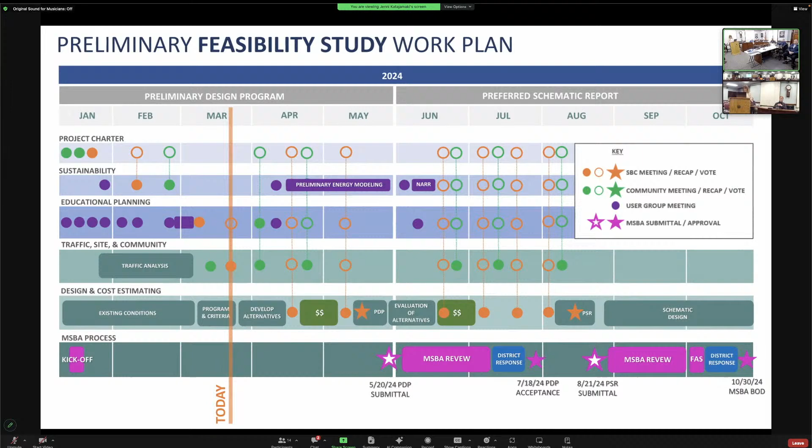So for the existing conditions assessment, we looked at all of these disciplines: environmental, civil, structural, building systems—that's mechanical, electrical, plumbing, and fire protection systems—building envelope, that's the walls and the roof, the interiors, code compliance, hazardous materials inside the building, and geotechnical, which is pending.

What we did: we looked at a lot of existing documents, did site visits, questionnaires, and a lot of discussion with the facilities department. Different members of the team also reviewed records from the health department, the fire department, and utility companies. We did database searches of various state and federal sources, and sampling and testing of potentially hazardous materials.

Starting with the easiest one, environmental, because basically there are no problems here. One of the things we look at with environmental is the prior use of the land. Prior to its use as Killam, it was undeveloped land. We looked for any evidence—visible odors, some air testing, any evidence of contamination, dumping, hazardous materials. The only interesting thing that came up was an underground storage tank, but we tracked down all the records—it was for oil before it was shifted over to natural gas.

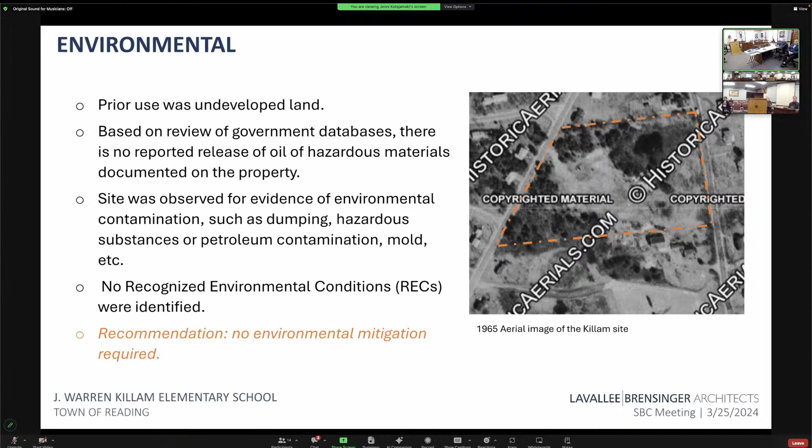Our consultant tracked down all the records for that, and it appeared to be all properly disposed of, and there were no reported spills. So basically, based on what we've found, we believe there's no environmental mitigation required.

I'll warn, of course, that when we go in there and do the actual physical testing, anything can happen. But I thought I'd say that.

Yeah, what we haven't done is tested soil. So when they go in and dig underground, they might find something, or they might find debris, whatever it is, we don't know. We commonly find lead and asbestos in a number of our sites, from old paint or God knows what else.

On the stormwater and sanitary, this diagram shows where the stormwater runs to on the site. A couple of things to point out: there's a crushed pipe here that's supposed to drain to a pipe to the storm main in Haverhill Street. That doesn't appear to be draining properly, so there's a low point at the northeast corner of the site that we've also observed is kind of soggy. That's the reason. And we've also heard reports that there's water overflowing from the Killam property to the neighbors to the north, which are at a lower elevation.

Most of the water management is through just on-grade surface runoff. So as part of this project, we'll be required to do a whole new stormwater management system that will retain or detain, I always get the wrong word. We just want to hold the water on the site and let it drain out slowly.

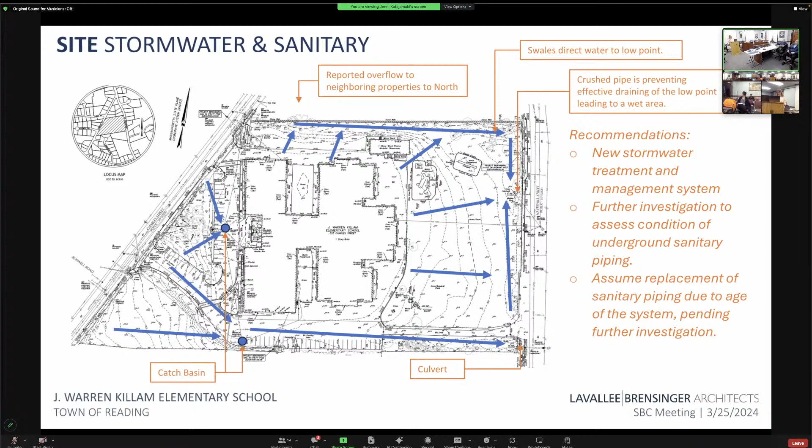I'm just going to keep going through, and if you have questions, stop me. On the site regulatory side, we determined the site is not in the 100-year floodplain, there's no wetlands, no protected wildlife habitat, so those are all good things. We don't have to go through those special regulatory reviews.

One thing that did come up is there's a parking requirement of 1 parking spot per staff person and 1 per 7 children, for a total of 200. If we go with the larger scheme of 690 students, it's a total of 211 spots required on site.

I would go in on this one and say it's really up to your town. That's a lot on a small site, that's a lot of pavement. When we work through it and decide what's actually the right number, I'm sure we'd work with planning and everybody to come up with what everybody feels is the right number. Does that make sense?

That seemed like a large number to me, even looking at your rough numbers. That's where the regulations usually start, but I have found it's more of a negotiation usually. So whose regulation is this? It's the town's zoning, so it would just be an appeal to the zoning board of appeals if we wanted to have fewer than that number of parking spots.

Do you know how many we have now, by any chance? No pressure. I don't know, do you know? Not as many as that, I think. No, it doesn't seem like there's that many, maybe 80? Yeah, something like that. There, they're parking on the streets too, we know there's, we'll find out later. So this is assuming a lot of things. Yeah, because I think the parking you have now is actually about right, since it's enough for basically all the staff and a couple of visitors, right?

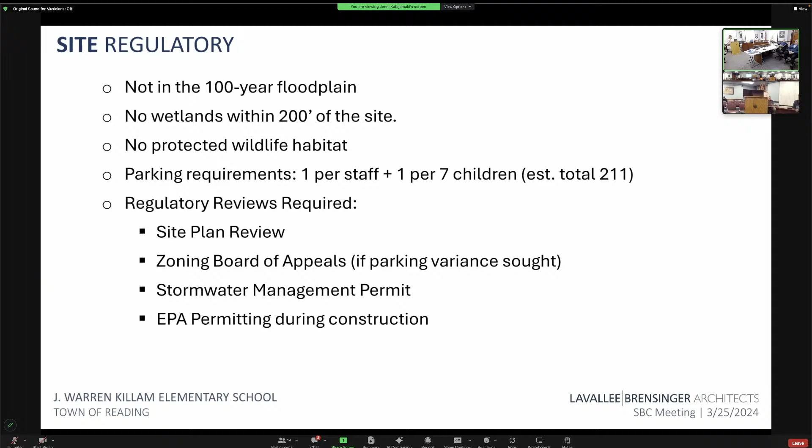The reviews we will be going through are site plan review with the town, potentially the zoning board of appeals, and we'll need a stormwater management permit. That'll happen at the same time as site plan review, and then there'll be some EPA permitting that has to happen during construction, which the contractor is responsible for.

So the structural system - the structure is typically concrete-filled hollow structural steel columns with CMU basically infilling in between the walls. I don't know how much I need to go into this level of detail - basically it's a steel structure, that's all I need to say about that.

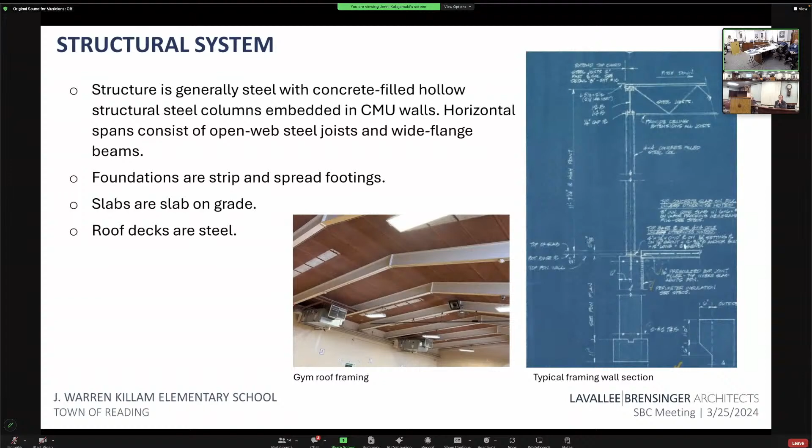Does that mean there's a high recyclable aspect - when I see those steel beams I'm like, okay great, those aren't going in the landfill. Sure, yeah, steel is recycled.

Is that type 2 construction? It is not type 2 construction - it's a one-story building, so it doesn't even matter. It's basically could be 5B.

So there's a couple of structural issues - there's some settling in this lower right-hand picture, some settling of the foundation. There's some differential movement between one wing and another wing of the building that's caused some cracking. The more substantial issue is that this building was built before seismic codes.

Depending on the amount of area that's renovated and altered, we may be required to bring it up to full seismic compliance with the codes, which basically means rebuilding all of the brick wall, all the masonry walls, because they're unreinforced and have to be reinforced. So that's the entire building, right? Or no - all the walls, yeah, you could probably leave maybe 70-80%, it's basically a bunch of columns with these CMU walls butting right up against them.

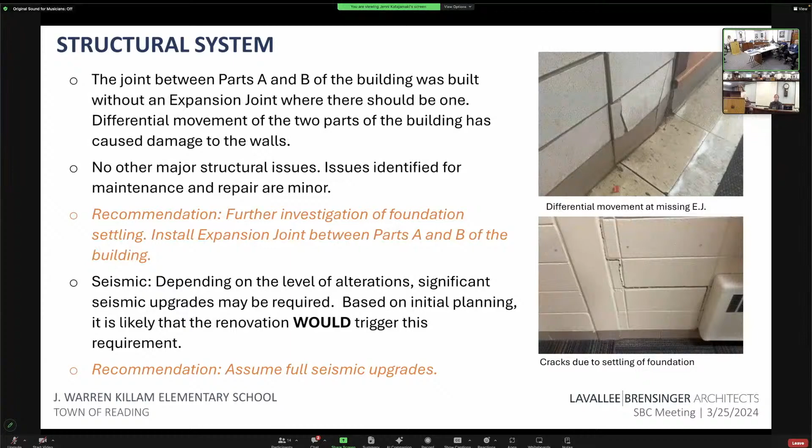So moving on to plumbing and fire protection. Fire protection - we know the building doesn't have sprinklers and it would be required to have sprinklers, so that would be added in the renovation scenario.

Also, there's some smaller problems with plumbing, but the primary problem is that there's lead in the water, and the source of that contamination is not known. It could be from the city water mains, it could be from underground water service, it could be from solder. So, also because of the age of the system, we would recommend a total replacement of the plumbing system.

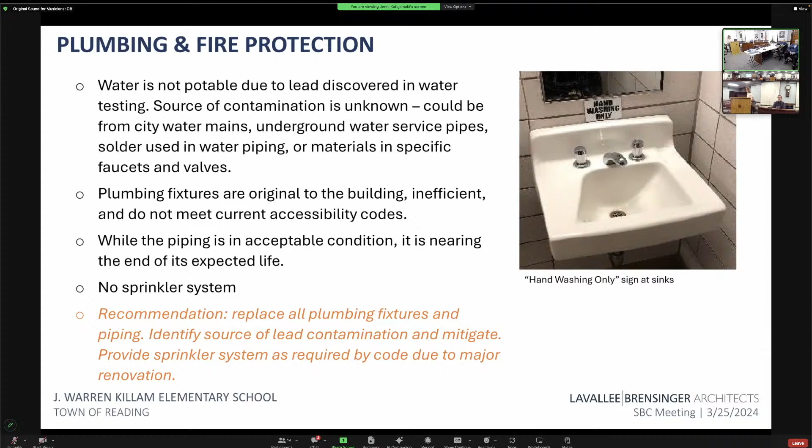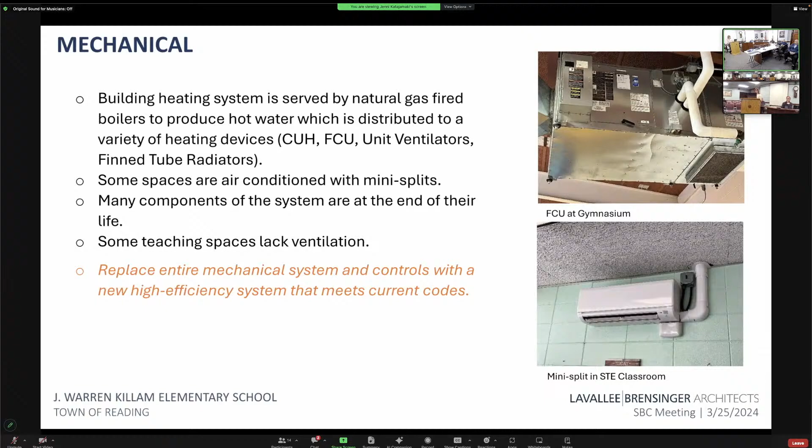The mechanical system has also reached the end of its expected life. So in a renovation scenario, we would recommend full replacement of the mechanical system. Same with the electrical system and fire alarm.

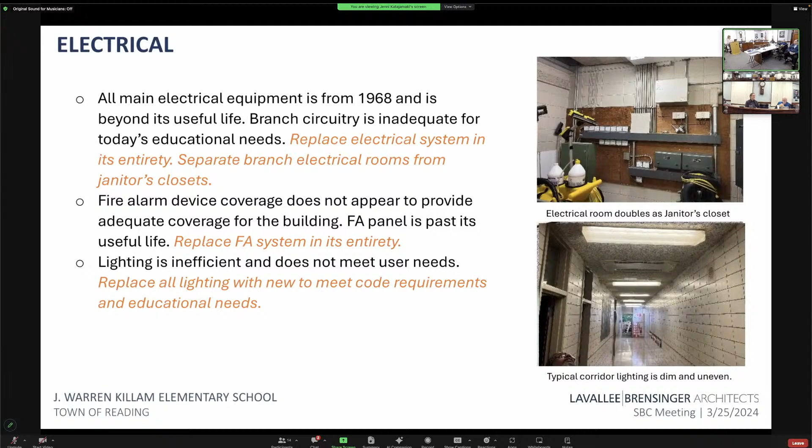One concept I want to bring up is that we're not just talking about patching something up. We're comparing taking this old building, which is there for a reason, and bringing it up to at least 50 years of additional life, compared to a new building which is maybe 75. So we're not talking about patch and repair. All of our cost estimates will try to make an apples to apples comparison, because otherwise you're not going to get much value from these. I hope that's fair.

On the building envelope, as Lee said, there's an airspace between the exterior brick and the backup CMU block, with damp proofing and flashing according to drawings, but no insulation. We haven't actually investigated to see what's there. Generally the walls were in good condition, but there's one area along the north facade with a lot of efflorescence and missing grout, which we think could be due to the airspace being blocked up behind the wall so water is weeping out through the brick instead. That would require more investigation, but in any case we'd recommend assuming a full reclad, removing all the brick and replacing it with new brick or a different material.

I'm not a construction person, but those concrete pilasters we're looking at would all have to be individually replaced. That's not how you build buildings now, and it's not up to code. Those concrete pilasters aren't the structure, they're not structural -- in a way those things are decorative. The steel is inside, you just don't see it here.

What I will say is, in our experience, when we open up a wall like that, it's usually bad. The reason is it wasn't flashed right, and it's been a long time. There's actually a steel column and plate exposed to all that water, which could be rusting. If water is actually pushing through, it means it's not weeping properly.

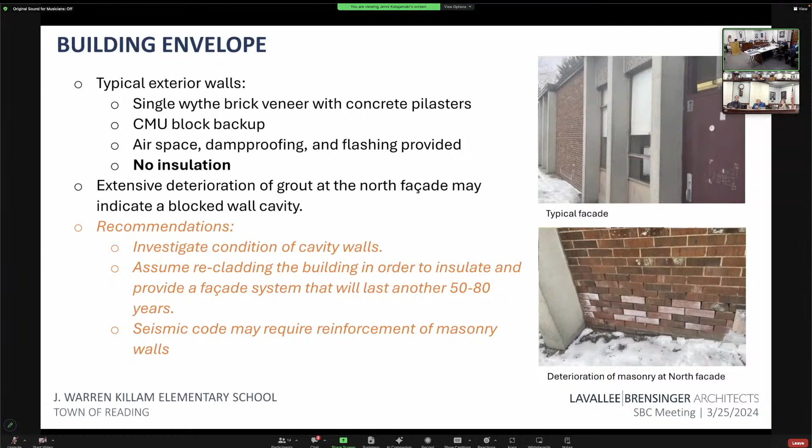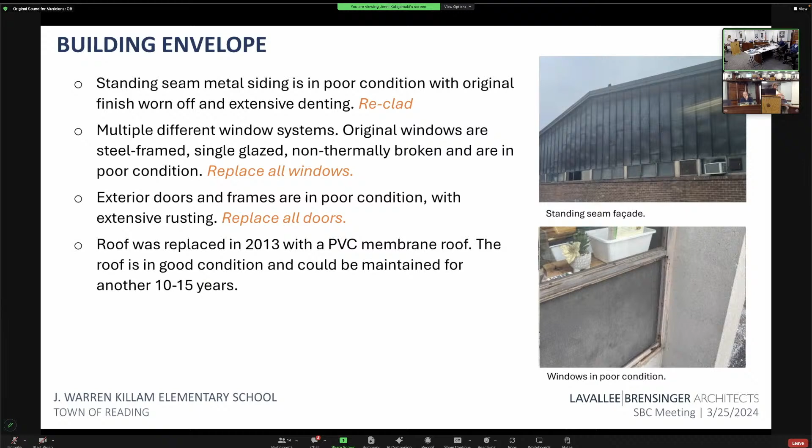A couple other envelope components: the windows and doors are a complete wreck and absolutely need to be replaced. The roof is okay, but given the level of renovation we're talking about, we would probably recommend replacing it so we can get the proper insulation and flashing, and get you a building that's ready to last another 50 years.

Interiors need a gut renovation. One of the things about having all that CMU everywhere - it sounds great, but of course the kids pointed to it and said, we don't like all these blocks, they hurt a lot when I get pushed against the wall. Which is very wise of them. Concrete masonry - they're all just blocks.

Thank you, what's the U for? Unit. Unit, thank you. Okay, CMU. Thank you.

But I do want to say that when you're putting in all new systems, it's not very forgiving because you have to drill through everything, cut it, patch it - because it's all block - and that just makes for a lot more cutting and sawing and all that.

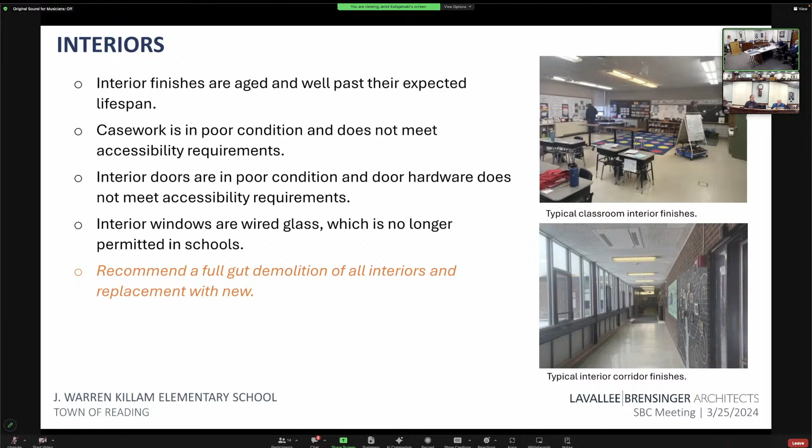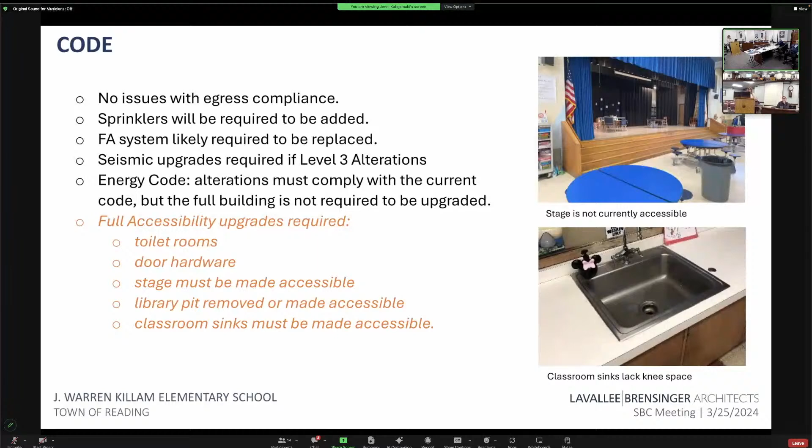On code requirements, there's no issues with egress compliance - that means the number and width of exits. The accessibility issues are relatively minor for a building of this vintage because it's only a single story, so you can access all the spaces except for the stage, which would need a lift. But toilet rooms need to be made accessible, door hardware needs to be made accessible - all these things will happen in a gut renovation.

On hazardous materials, there is asbestos present in the building, which we know - all buildings of this vintage basically have asbestos-containing material, and that needs to be disposed of properly in any renovation or demolition. Also, in spaces that will be the preschool, there will need to be lead mitigation, and that just needs to happen.

Surprised it wasn't the whole school. The rest of the school doesn't need it because the lead regulations are only OSHA regulations that have to do with the safety of workers during construction.

If I can just pipe in on the asbestos, for the record, many buildings of this vintage have it. If it's not being disturbed, it's not a safety issue. When we're talking about insulation on pipes and stuff, many of those pipes are buried in walls and ceilings, so I don't want people worried that there's asbestos in the building - it does not mean it's unsafe. Once you start disturbing those areas, we would need proper abatement, and that will absolutely be done, but it's not a danger as it sits right now.

Thank you, Mike - I just support that. There is no asbestos problem with the building as it stands right now. It's all contained; it's once you start moving it that matters. As long as it's not disturbed, asbestos is perfectly fine.

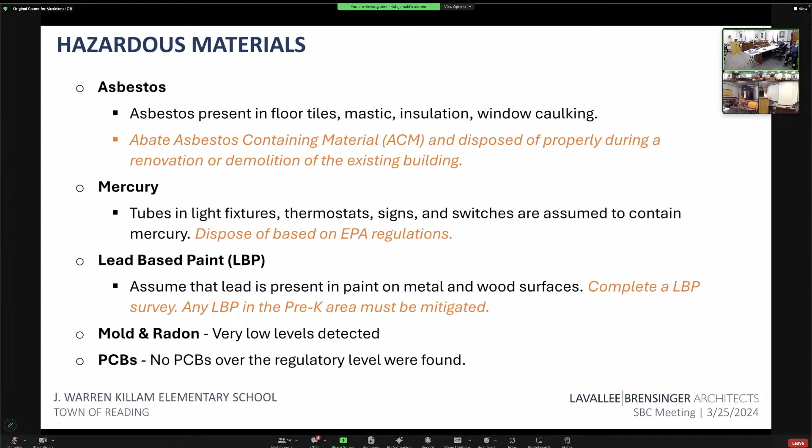There was no mold or radon detected, or very low levels below regulatory thresholds, and the same with PCBs.

Then on the program, so this is interesting, right? If I have here the program summaries of your existing building, you have about 60,500 gross square feet, that's with the portable classrooms. Option 1 with just a partial pre-K program would be about 103,000 square feet, and option 2 with the 12 pre-K classrooms would be 123,000 square feet. So we need to add somewhere between 40 and 60,000 square feet.

So the biggest problem this creates is on the site. If we leave the whole existing school and build an additional 40 to 60,000 square feet, there's not going to be any space for a field, and it would be very tight to get enough parking, drop off, and play spaces without a field.

We'll be looking at those kinds of diagrams, starting with traffic and all that. But we wanted to give you a preview that the renovation of the existing building, or even half of the existing building if we decide, is going to be predicated a lot on what actually can fit on the site, which is necessarily a larger building that has the program that the MSBA requires, and also the program that your special education and everything requires. It does not have right now.

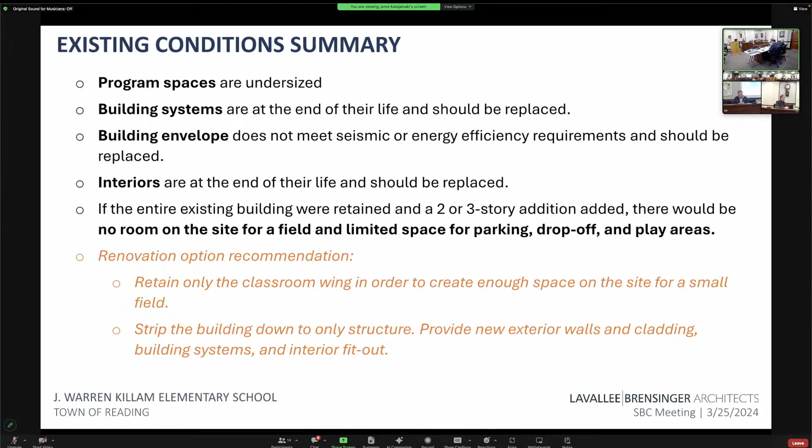Cool, we want to get to the traffic thing if we can. That's the end of my existing section. We promised this is a draft, it can be modified, we don't have geotech yet, and we'll be posting it soon enough. Once we've gone over it one time, you could study it more in detail. Fair enough? This is excellent, Jen, this is awesome, thank you so much, Jay. Really, really great. Good, this is very interesting to hear. I think it confirms a lot of things, but it's good to see it in print.

And I'll turn it over to Rebecca to talk about traffic. For those of you who don't know, Rebecca and her company did the traffic study at Swampscott, which was very intense in their neighborhood, and they also did Acton and Foxborough, and other places, and worked very well with those communities, which you saw. Take it away, Rebecca.

So I know a lot of you saw the presentation already last week at the community meeting, so I'm going to give just kind of a brief summary of some of that existing condition stuff and talk about what we heard from people at that meeting, and then I'll go forward talking about the next round.

So the things I want to discuss with you tonight are covering the study area that we looked at in our traffic study, talking about the existing conditions in terms of what we saw for the morning and afternoon observations at the existing school, the surrounding roadway network and what we saw there, some collision history at surrounding intersections, and also the traffic counts and speed studies that were collected.

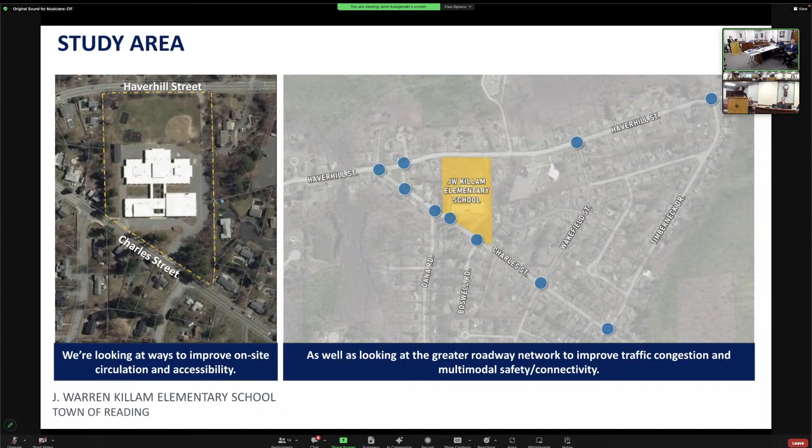But we did get a good handle on some of the accessibility issues at some of these crossings and where there are crosswalks located, where there are crossing guards at those crosswalks or other equipment provided.

By the way, members of the school committee and other town people were at the community meeting, and they asked me about using or how to utilize your services or understand the areas around in the whole neighborhood that really are deficient, and how to bring all that up since our focus is on the site itself.

Yeah, so we did identify a number of deficiencies that we'll walk through in the surrounding area, many of them that can be addressed right now before the school were to even be constructed. So some of the questions we got is what can we do to make this happen now? So we'll show a few things that we can do to make those things happen now.

So for the existing school, obviously there's an elementary school with roughly 420 students enrolled now, and then 2 pre-K classrooms with 30 kids in those classrooms. And you can see from the map here that shows the school district boundaries that this is really a neighborhood school that we're talking about.

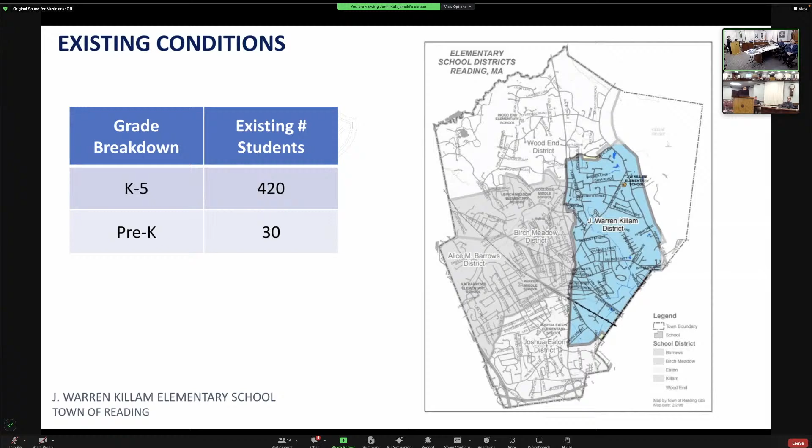So kids are coming from not very far away. There's a lot of opportunity for walking and biking on those nicer weather days than what we saw. But it really is more of a neighborhood type of school.

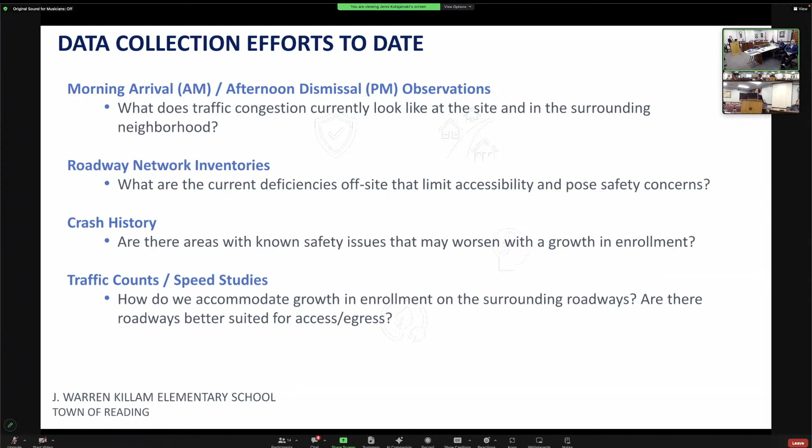The data collection efforts we've done to date were really multifaceted. We went out and did actual observations, boots on the ground, looking at the actual traffic patterns, how people are getting to school, what's going on around here. We also did roadway inventories once all the traffic was cleared and looked at the actual conditions of the roads, the accessibility of the sidewalks and pedestrian crossings. We looked at the collision history to see if there are any significant crash patterns in the surrounding area that might indicate a safety issue. And we also did traffic counts and speed counts, which help us assess where there's heavy traffic volume, where there are high speeds we want to keep kids away from, and which roadways are better suited for access and egress.

And it's not that bad, considering it's the morning, and the morning always flows really quickly. It's the afternoon that's always the crazy one. We can improve though. When I did the mornings, it wasn't that fun. No, it's not fun, and they've seen a lot of situations. As I mentioned, this was a 10-degree day, so there were a lot of people driving their kids to school that day. So this really represents a worst case scenario of what happens on those poor weather days when people are driving their kids in.

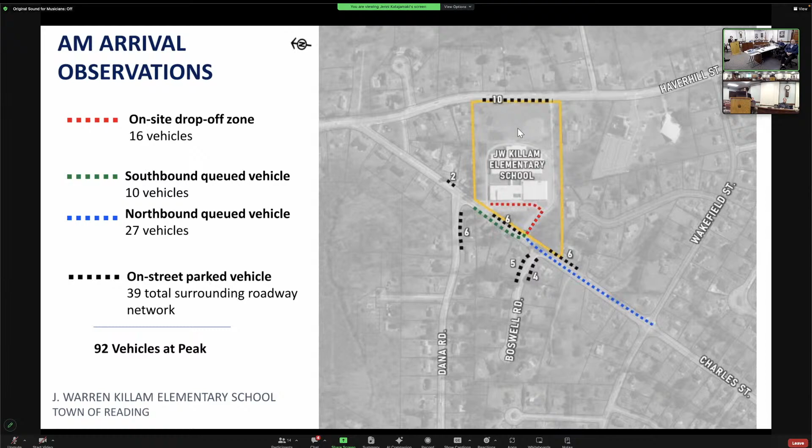Some of the things we saw during those observations: right in front of the school, with all the parked vehicles on the corners and this being a neighborhood school where people are walking, there was a high number of pedestrian crossings in this area. The crosswalk is located, if you come out of the school and take a right-hand turn, right between Dana Road and the school driveway. So all these parents are looking to their left to see oncoming traffic, and then they pull out and there's immediately a crosswalk there. The other thing we saw is that there's definitely some training needed for the crossing guards, as they're stopping traffic pretty much constantly to allow people to cross the roadway, even when they see someone coming from further away.

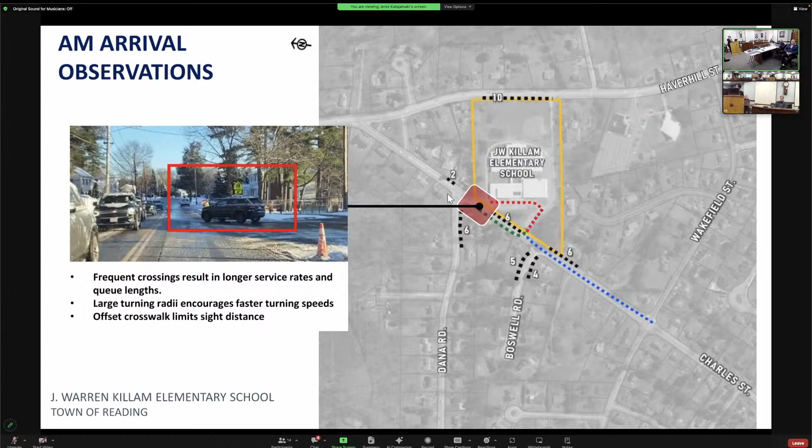So it's holding up traffic quite a bit, where if they were holding the kids at the edge of the roadway, waiting till a few of them collect and then crossing them, the traffic might flow more efficiently. There's also a very wide turning radius there, which gives cars coming out of the school the ability to pull out faster. The location of that crosswalk also creates sightline issues for vehicles coming out of Dana Road, and I'll show you a picture of that in a bit.

So this is coming down to the entrance as you're turning into the school. You can see that the parked cars and queued cars block access for the sidewalk here for the pedestrians walking into the school.

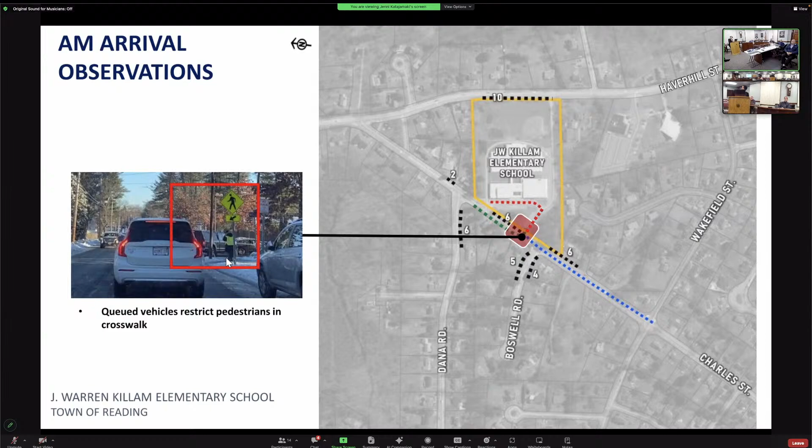That creates really a safety issue for those pedestrians as well. One neighbor talked about how the cars pull up, they're actually parking on the sidewalk, and their kids are trying to use the sidewalk, and sometimes they open the door and the kid walks into the door. They also mentioned people with strollers can't get by when the doors are open.

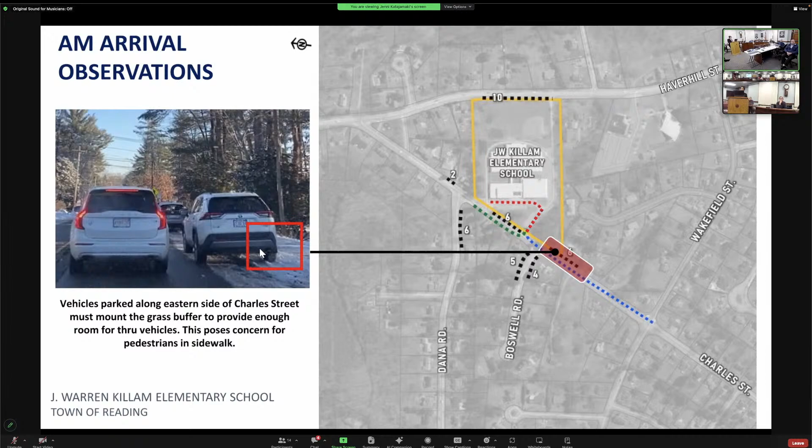You can see in this picture there's a car that's there. There is actually, although it looks like snow here, a grass buffer between the sidewalk and the pavement. That grass buffer is pretty heavily sloped, and you can tell by the angle of this car in the picture, but the cars will pull right up over the grass and onto the sidewalk there.

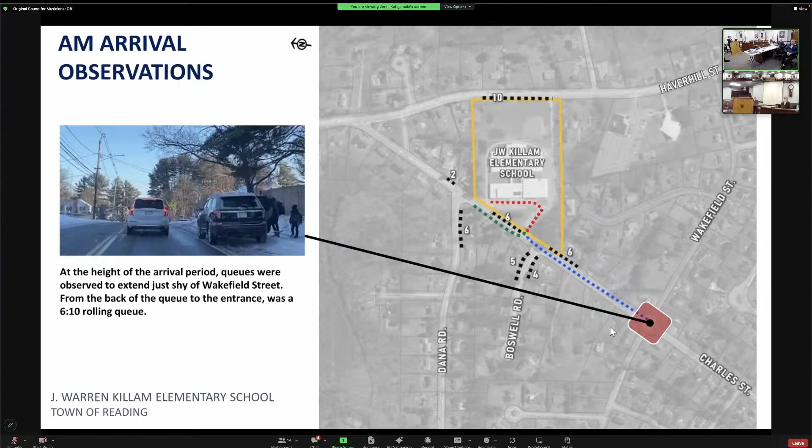And then during the peak of the morning arrival, you can see that the queues are coming all the way back down towards the Wakefield Street intersection. So that's a pretty extensive queue we're seeing in the morning.

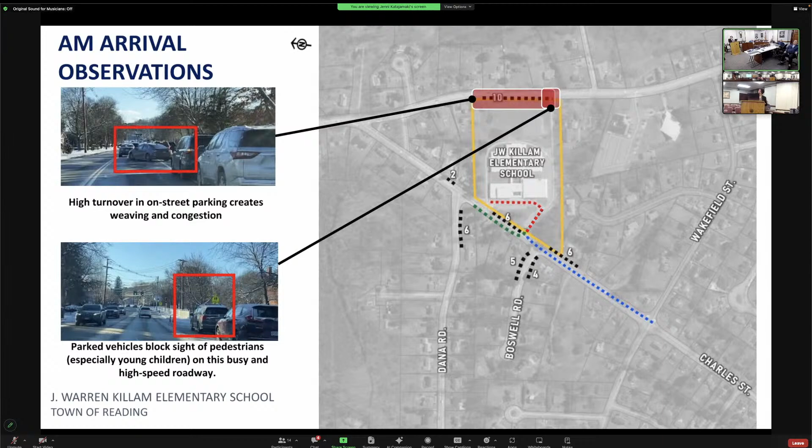Up on Haverhill Street, which is a high-speed arterial roadway in that area, you can see the weaving pattern that happens with cars weaving in and out of those parking spaces. Those vehicles are also blocking the sightline for pedestrians. You really can't even see it here, but there's actually a pedestrian standing right there waiting to cross the roadway, and that's definitely a big problem. You'll see in one of the future slides that people are not slowing down in that school zone at all either.

So in the afternoon it's a very different pattern. Only the buses are allowed onto the site, and the parents have to park in the neighborhood and then walk to the school to pick up their kids. So we see a lot more traffic parking in the neighborhood, extending way down Dana Road, all the way down Charles Street, back towards Wakefield Street, up Boswell Road, and then beyond that designated parking area on Haverhill Street as well.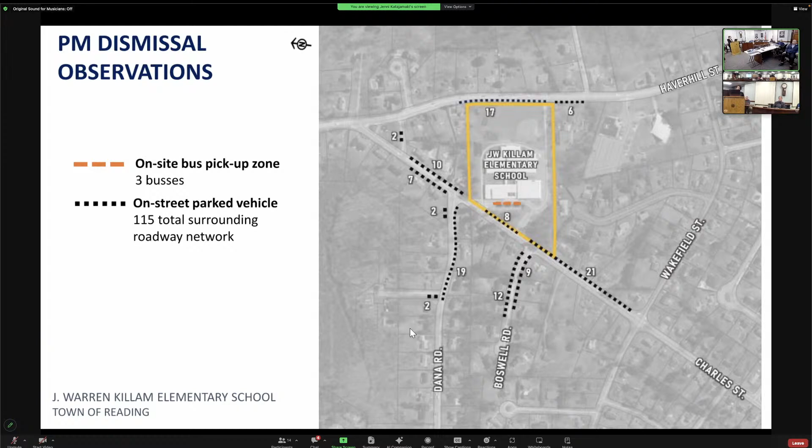At the peak time, we saw approximately 115 vehicles that were parked on the streets in the surrounding neighborhood, and you'll see some of the reasons why that is a big problem.

You can see here from these pictures that there are vehicles parked on both sides of the roadway. Charles Street is very narrow, so when you have vehicles parked on both sides, it really only leaves one travel lane to get through up the middle. So cars are kind of taking turns getting past each other, which, if there were to be an emergency during that time, an emergency vehicle would not be able to get through.

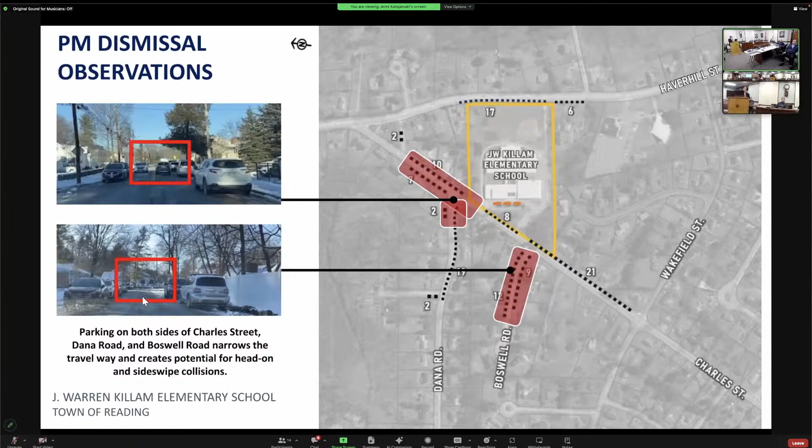Particularly on Dana Road and Boswell Road, which are even more narrow than Charles Street, you can see there's just barely one lane you can get through. The big thing to know about schools, which I've learned, is that in the morning people flow through and show up pretty much on time, but in the afternoon they'll show up 45 minutes early and park and just start idling. So it's a very different situation in the afternoon.

In these pictures here, you can see some of those sightline issues. This one on top is right at the corner of Dana Road, where that crosswalk goes right up to the school. Coming out of Dana Road, all those cars parked down there block the view so drivers can't see the kids crossing the roadway. Then coming over to Boswell Road, those cars are all parking right up to the intersection, despite the fact that there are no parking signs there.

They're all parking right up through the intersection in those very wide radii that are provided, and you can not see these small kids crossing the roadway around those parked vehicles.

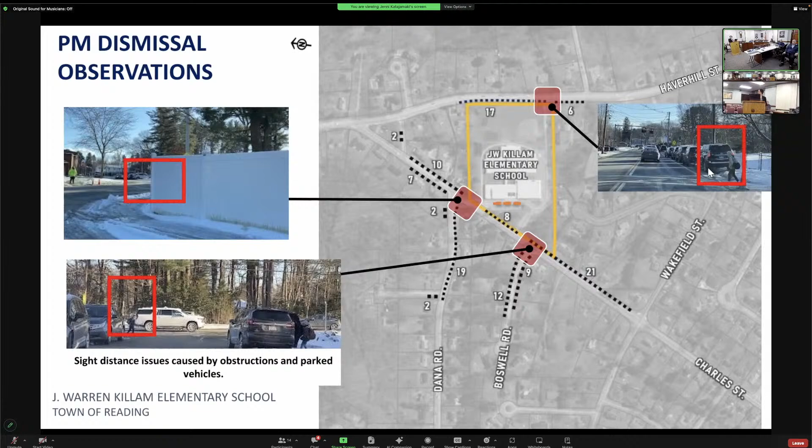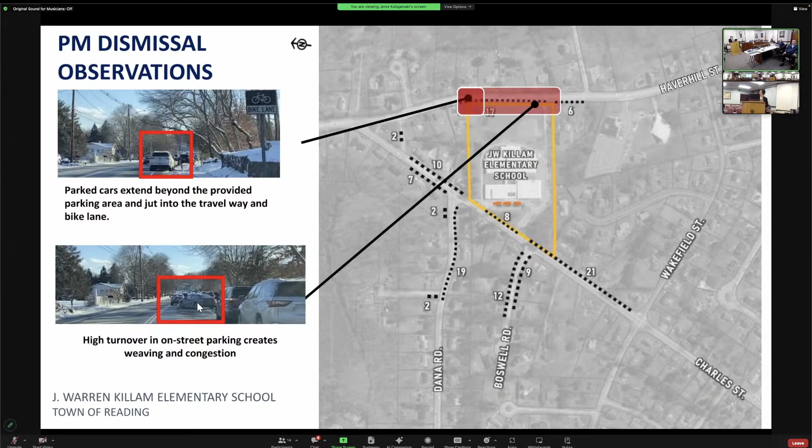Same thing over up here on Haverhill Street, where those parked vehicles are blocking the sight lines of the kids. The other thing we see on Haverhill Street is cars extending beyond that parking area, jutting out into the roadway, creating more of that weaving pattern as parents come in and out of those parking spaces.

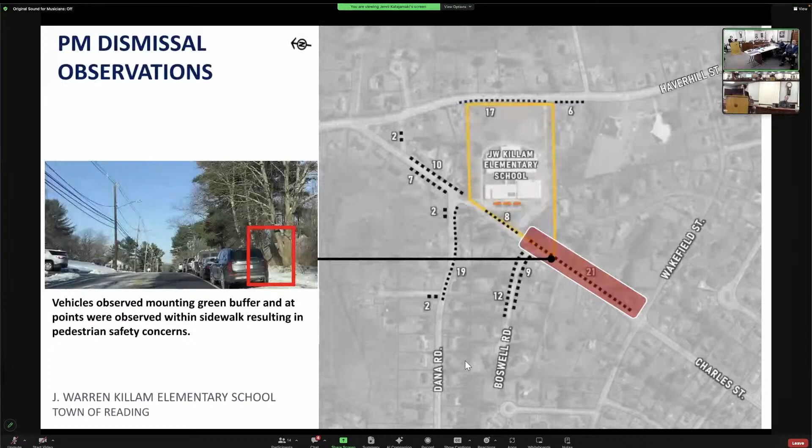This one is also showing you vehicles parked up onto the sidewalk here, which now in the afternoon, rather than just being right in front of the school, extends all the way down to Wakefield Street, parking on the sidewalk and making it very difficult for kids to walk to school.

So some of the things we see in the surrounding area are very similar problems in terms of accessibility to what we see right in front of the front door.

Out on Haverhill Street, there are several crosswalks, some of which are mid-block crossings. Due to the curvature of Haverhill Street, a lot of those have poor sight lines, so you can't really see them as you're coming around the curves. They all have static signage, just the standard pedestrian sign at the crossing itself, but no advance warning that a pedestrian crossing is coming, and no dynamic signage that would alert you when a pedestrian is actually crossing the roadway.

There's also some rather long crosswalks because of the alignment of some of these intersections, particularly at Charles Street and Haverhill Street, where this crosswalk here is quite long.

Many of the crosswalks do not meet ADA guidelines. Most are missing the detectable warning strips, and many also have slopes that don't meet requirements. In some cases there are no ramps at all, which creates a tripping hazard for younger pedestrians, and also an accessibility issue for parents walking with strollers trying to get onto those.

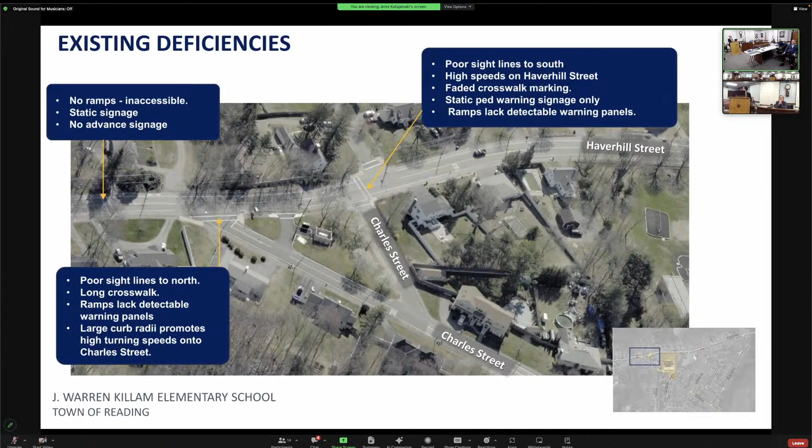Moving up Haverhill Street closer to the school, we see the same type of issues: the crosswalk right in front of the school is faded, there's poor sight lines due to parked vehicles on the street as well as the curvature of the roadway coming around the corner, and you can't see the pedestrians coming from the school side of the street.

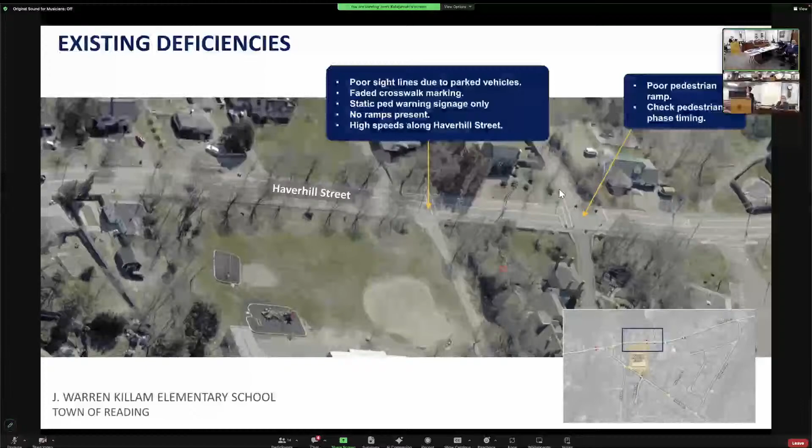Down at the next intersection, there are poor ramps. A lot of these issues we've already touched on, but just noting the crossing guard location here where there is a crossing guard.

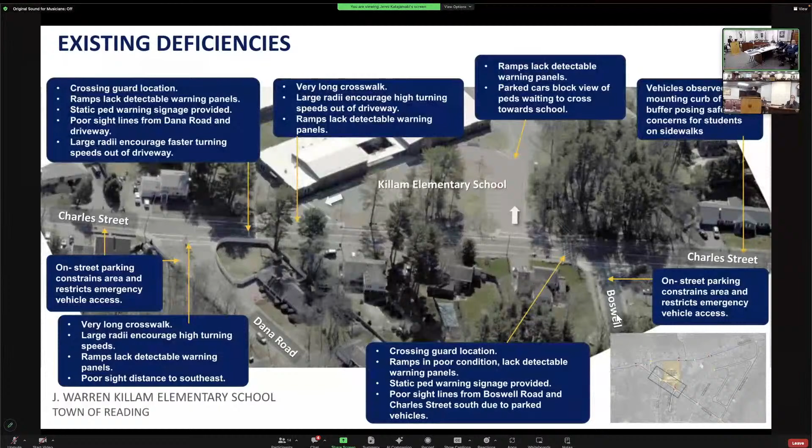You can see here that wide radii on the Dana Road intersection too, similar to up at Charles Street. What makes this one even more dangerous is that cars park all the way right up to the crosswalk, and you can see the narrowness of the roads where the on-street parking creates an issue.

Then coming down here to the Charles Street and Wakefield Street intersection, you can see from overhead it appears very much like a four-way intersection, and as you're driving through it feels like it should be because of the design of the crosswalks. But it's only a two-way, so only the Wakefield Street approaches are actually required to stop.

Nicole Rogers from our office actually experienced a near miss at that intersection, where someone coming on Wakefield Street wasn't aware they needed to stop, and she almost got into an accident while she was on Charles Street.

And we do see from the collision pattern a number of crashes occurring there. You never want your traffic consultant getting in an accident. Yeah, that would definitely be bad. Always revealing. Very ominous.

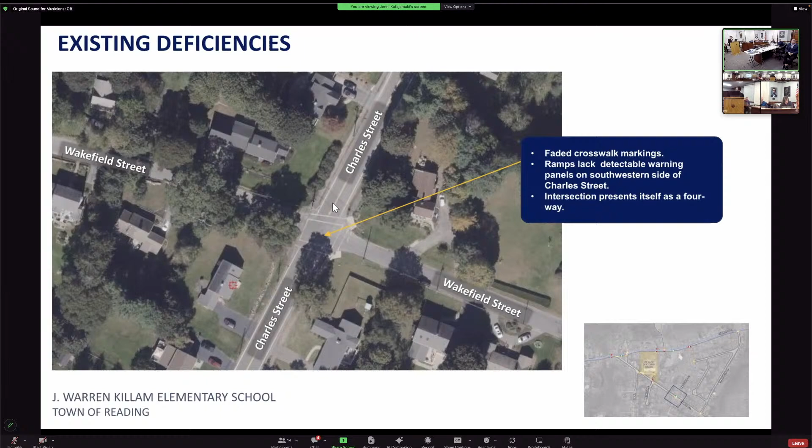So the ramps there again are not ADA compliant, so there's some improvements that could be done to that location to bring it up into compliance and make it a little bit safer.

From the crash history here, you can see that we looked at the crashes at all of the study area intersections from 2018 to 2022, collecting pre-COVID and during-COVID data to see what the crash patterns looked like.

There were two high crash locations that popped up in the study area, and it's not very surprising which two those were. The Wakefield Street at Charles Street location had a high number of angle type collisions occurring, consistent with people not understanding the traffic control there.

Then there's the section along Charles Street from Haverhill Street, down in front of the school, to Boswell Road, where there were a high number of crashes. 60% of the crashes were with parked vehicles, showing that parking on the street is an issue, and 50% of the crashes happened on school days during morning arrival and dismissal. That's a clear indication we need to address this moving forward.

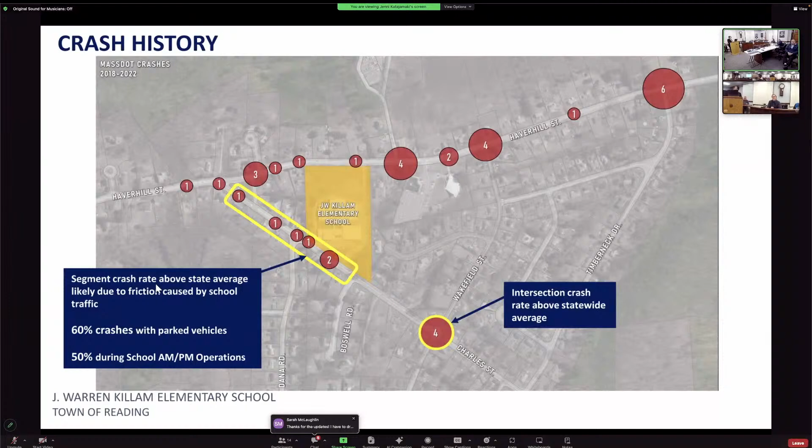Looking at the speed counts, we collected speeds on Charles Street in front of the school and on Haverhill Street in front of the school. Both are marked for school zones that bring speeds down to 20 miles per hour during the day. On Haverhill Street, although posted for 35 miles per hour, speeds are actually closer to 39 to 42 miles per hour, which isn't unreasonable for an arterial roadway midday.

What's particularly alarming is that when the school zone flashers are activated, speeds are still 37 to 40 miles per hour, which is really high for kids. The signs are still flashing, so it's not helping. That's definitely not a good situation.

With those travel speeds and high volumes on Haverhill Street, we wouldn't recommend having the main access be on that side of the building. We would recommend it be on the low speed, low volume side on Charles Street instead, and that we upgrade those pedestrian crossings and implement traffic calming measures appropriate to an arterial roadway to try and bring down those speeds.

Speed bumps are actually not allowed on an arterial roadway, so typically what you would do is create bump outs into the roadway, narrowing it a little bit and bringing pedestrians out beyond the parked vehicles to a place where they're visible. Then we'd install RRFBs, or rectangular rapid flashing beacons, so people see that there are pedestrians there. We have a few of those indicated, so I can show you when we get to that slide.

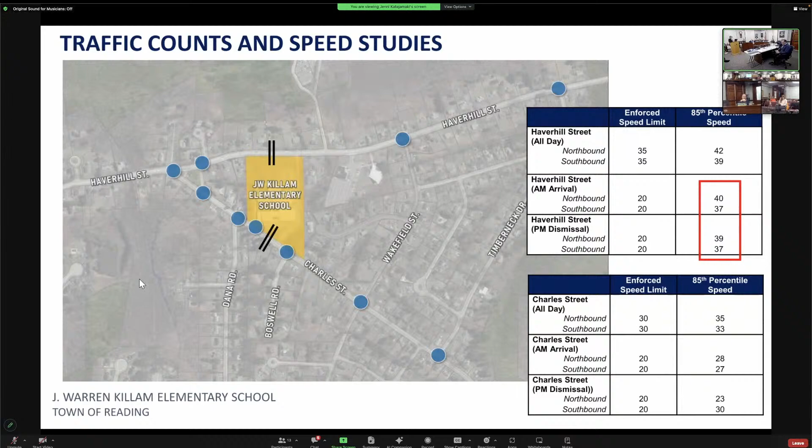That is all the things we're just about to get into. Sorry about that. No, you have good timing, it's a great segue into all of that. Sorry, I didn't even know, I should have looked ahead, sorry.

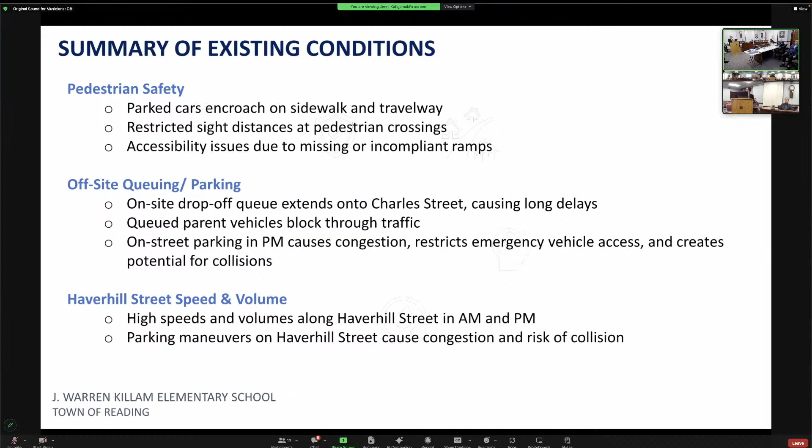So just to summarize the existing conditions: the parked cars on the roadway are an issue. They're encroaching into the sidewalk and the travel way, restricting sight lines for pedestrians at the crossings, and there are accessibility issues at a lot of the crossings. Off-site queuing in the morning is an issue with the drop-off period, and parents are blocking traffic from getting through. The speeds and volume on Haverhill Street were the big issues we saw.

Can we just, before you get away from existing conditions - these are going to be the same for the next few years until we build a new school, if we build a new school. Do you have any specific recommendations that the town should be addressing?

We do, yes. As I go through our recommendations for the school in the long term, many of those are things that can be done short term as well. So you'll see not only those things with the town, but the principal and their team already talking about what can we do right now, just do differently. So they're all over it. I have some asks when we get to that slide, things I could use some help with. The principal has spoken - we knew she was there somewhere.

Yeah, and we can attest to the fact that we did that in Swampscott too. We went out and did all of our observations at the Stanley School and nearby middle school, and saw a number of things they could do right from day one, even just with where they're stopping kids to have them cross the road. They actually implemented a lot of those and it's working a lot better at the middle school now, and we'll see how things work when the elementary school opens.

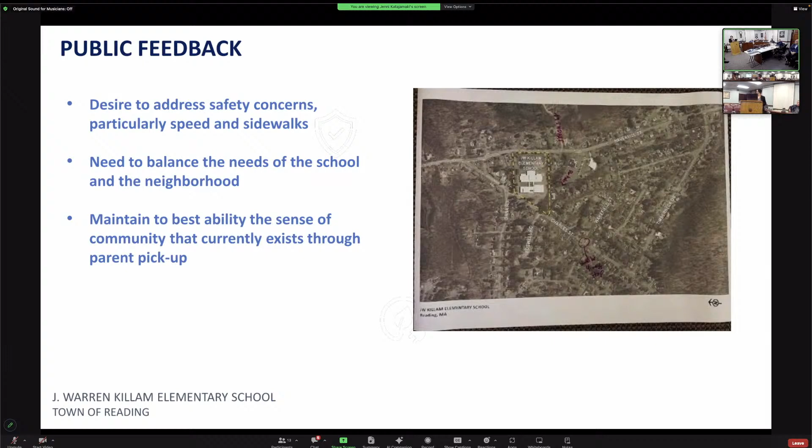So some of the goals that we had: obviously improve the pedestrian visibility and safety, accessibility, all of those things. We want to alleviate some of that off-site parking and queuing that's happening, get as many vehicles as we can back onto the site, and then look at improving the access, looking at which roads are better suited for access, and what kind of access and circulation flows we can make work well. And then developing a strategy that can work well for both the pre-K and for the K through 5. Obviously we want that solution to work well for the neighbors as well as the school.

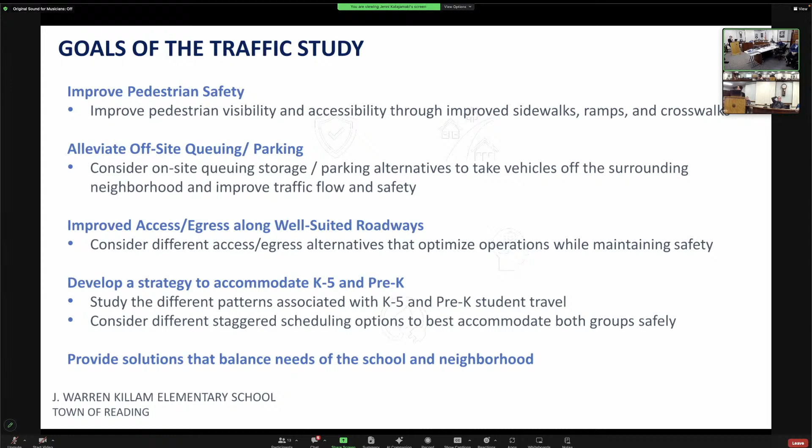So this is just highlighting the 4 areas that we were looking at and considering alternatives for the school. Obviously pedestrian safety and accessibility, we were looking for options that minimize conflicts between pedestrians and vehicles, and also provide convenient connections between the street network and the school, as well as to the play areas on the school grounds.

Parking: we were looking at how much parking we can actually accommodate and the layout of that, and how that works well with the site, both in terms of staff parking and parent parking. And then how much queuing we would be able to get onto the site so that we could alleviate some of that off-site queuing, and also trying to optimize the layout so that we can get as much play space as possible.

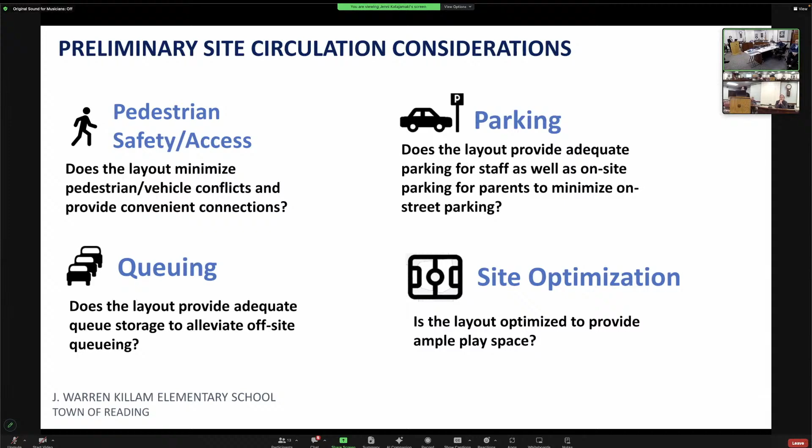So I want to make a point here. Ready? These are not designs. And the reason I say it like that is because what we want to do is focus really on the traffic patterns and things like that.

But there are some revealing things here, like the amount of, or lack of amount of, play space that's left over when you have one story and stuff like that. I just wanted you to know that this isn't fully fleshed out, because our site design will be everything connected, not just traffic and parking. It's got to do a lot of things. So we really want to focus on flow, queuing, and parking, and that's what I want to say.

So these first options are options that show what could happen if we were to maintain the existing building here. Half the existing building, correct. So if you look at the middle one, you can really see it.

And we're trying in this scheme to keep the classroom wing one story. So in order to keep the school open, obviously the addition would have to go at the back on the Haverhill Street side, and then remove the front side of the building.

But that actually works well from a traffic perspective anyway, because we do not want to have the heaviest access point be over on Haverhill Street. Although that can be used for buses or a service entrance where there's not as much traffic, having that be the parent access point or even the staff access point is not really desirable.

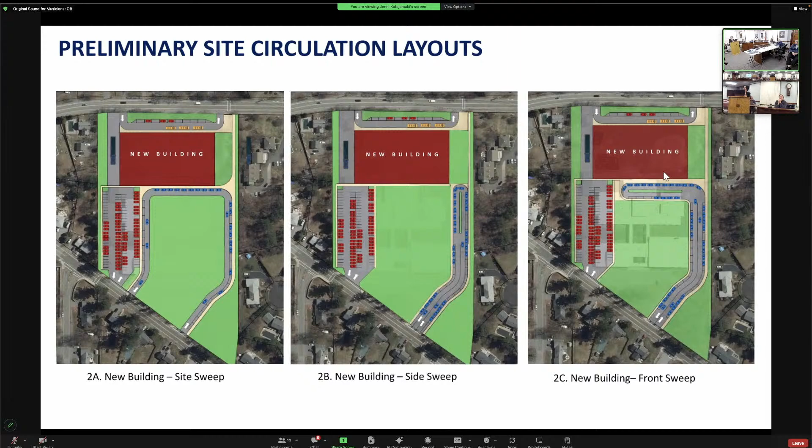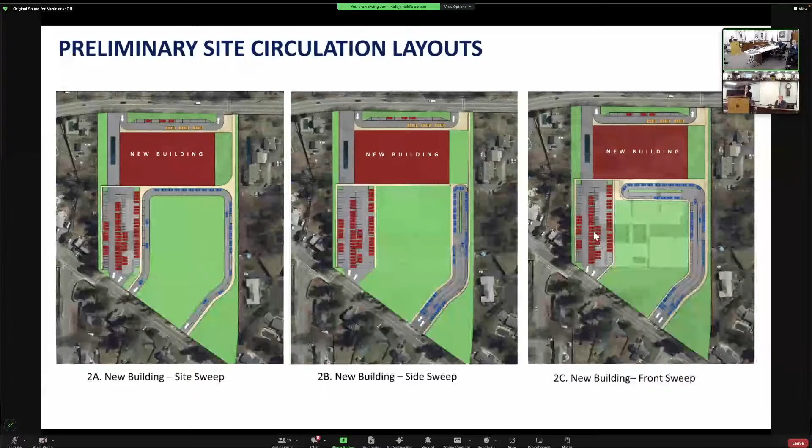What would happen if we had an access that just came up to the side of the building and back down? And what if we had a hybrid that allowed us to loop into the front so we could get more vehicles stacking on the site, both morning and afternoon, and what would that look like for play space and parking?

An essential component is to always try to separate the buses from the cars in some way. With only 3 buses it's already a major problem - it's scary sometimes, and they shouldn't be parking at the front door mixing with all the cars. It's a very dangerous situation.

What percentage of kids come by bus relative to others? I don't remember the exact numbers offhand. There's only 3 buses - one is the Boston bus that goes to different stops, so it's just a few kids. Somebody online, like Lindsay, probably knows. By a great majority, you're asking how many come by bus relative to how many come by car?

It's been variable, but there's at least 120 that might come by bus. In the afternoon there are 4 buses because the YMCA also picks up students.

What are the barriers to getting that number up in terms of busing? What determines those numbers? Well, a large percentage of students on our bus are not actually in the Killam district - they're students who need transportation to access school, so that changes where we're picking up the number of students.

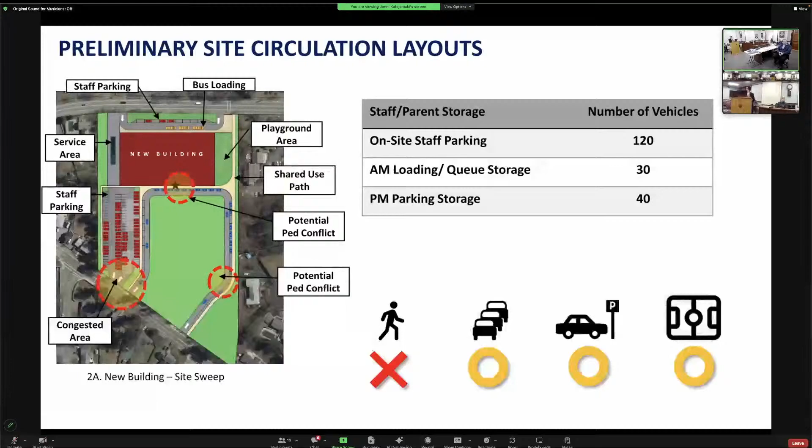What is this? Oops, did I skip one? You went backwards. I was wondering, knowing a lot of schools like this with this alternative parking area, how other districts are managing those. What do you mean alternative parking area? I don't mean to say - the bus loading and the staff parking.

Parents are very creative, and there's a school across the street as well, so what I've seen in some of our schools, we build all these egresses and then we chain them and no one ever uses them, and I don't know what they were thinking. But I can't think of any school in our community that does anything like this, and I was really just wondering about management after school.

I don't know how other districts keep it - so it says staff parking, so how do you enforce that? How do you let the buses in and out of there and keep the parents out? Yep, well, the buses...

You would definitely sign it as buses only, and you could put buses only between certain hours, so that you still have access to the parking midday for visitors to be able to pull in there. But you would also have crossing guards located at these driveways to get people across, and the crossing guards can definitely deter people.

The bus doesn't have that loop in the front or on Haverhill - I'm not a big fan of it anyway. But the idea of having an emergency access there might work well. So we'll keep on chipping away at that.

I hadn't seen these, so go ahead. Yeah, so this is just showing a few options for how we could lay the parking out a little bit differently, to kind of change the play space and the bus loading area.

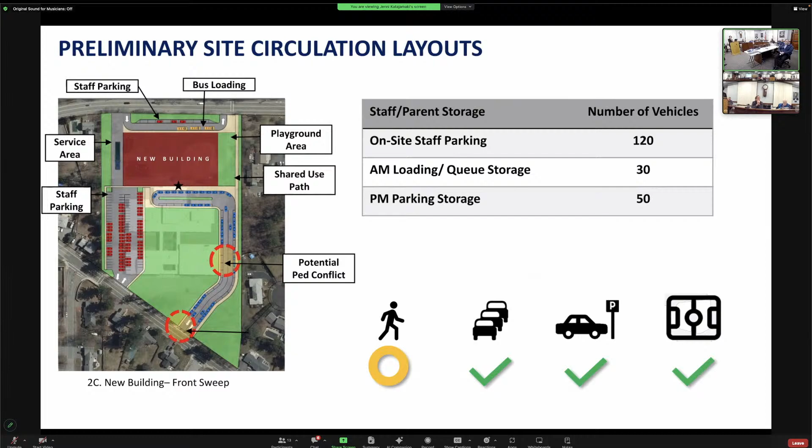So we've shown some alternative layouts of what that loop would look like. In this one, we could bring in the buses down the side here and have them unload in this area. Although this is shown as a connection, it could be a traversable connection that looks like a pedestrian crossing, so parents are clear they're not allowed to drive through there. It doesn't need to be as wide as shown—if the buses come in one side or the other, on Haverhill at that point, it could be very thin.

On all of these, if you look at the right side, there's an intent—I wish it was thicker—for a walkway through the whole site, through the trees, all the way to the other side, connecting over to Haverhill Street. This safe walk goes through the whole site for everybody, which is kind of happening now but not very well, and it's not safe. The goal is to make that really the pedestrian roadway, away from the bus and vehicle traffic. It's shown here as 8 feet wide minimum, so it would accommodate two-way pedestrian and bicycle flow, though it could be even wider to make it a nice space connecting Haverhill Street and Charles Street.

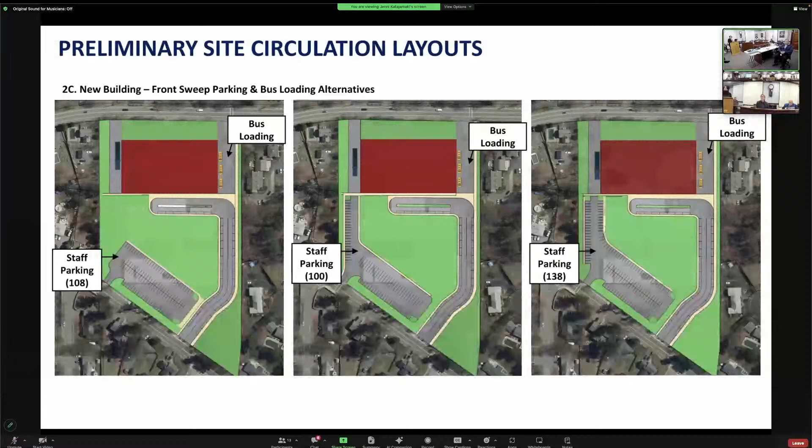And that's a possibility for like 30 safe parking spaces that are not blocking people's driveways, between the school and down to the Wakefield Street intersection.

Because if you think about it, in the morning the queuing, if we do one of those things right, the queuing is mostly off the street, and it's not in front of those, because we've done a long queue somehow, there was a length to that, I guess.

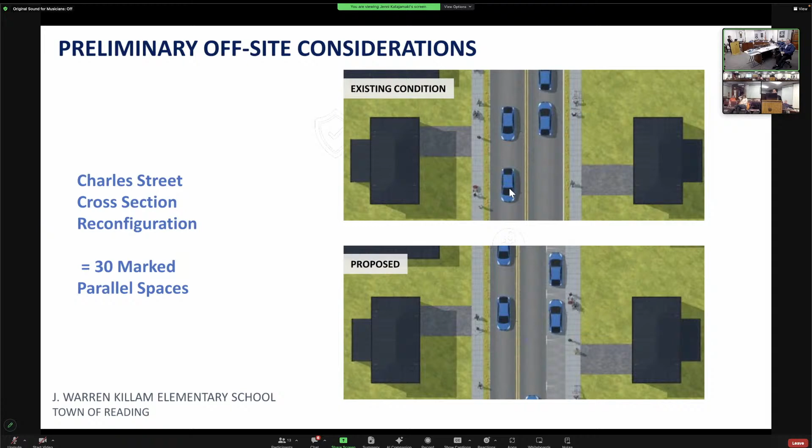Was that everything, or did you have more? The last thing I was going to mention is looking over at Haverhill Street, where we talked about traffic calming measures to tighten up some of the intersections so it's not such a sweeping turn. Installing RRFBs - rapid flashing beacons - at the crosswalks, so people press a button and it starts flashing to let drivers know someone is crossing. And instead of static school zone signs, we'd have signs displaying your speed below it, so people know how fast they're going, and it would start flashing when they're going too fast during school times.

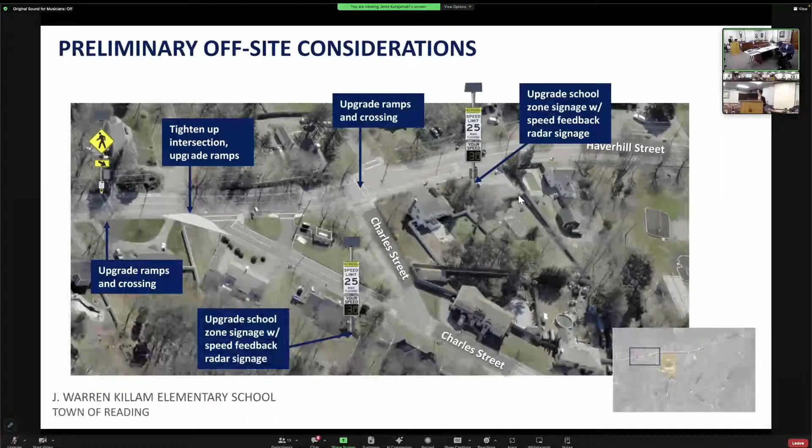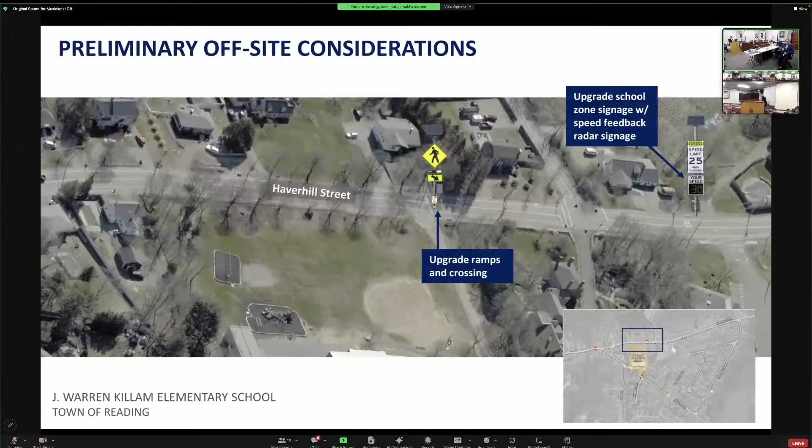And then further up towards Haverhill Street, right in front of the school where that major crossing is, having that same RRFB located there. That seemed like the spot where, if everybody's going through there, you might actually want to almost stop traffic.

That RRFB might be one where a hybrid beacon may be good, particularly where there's the ice arena across the street, which is looking to expand. Is there a crossing guard there in the morning? Yes, there is. So that might be one where a hybrid beacon actually stops traffic - drivers would see no light the majority of the time, and when the button gets activated it would turn first to flashing yellow, then solid yellow, then red, and then the pedestrians go.

Probably cross to the preschool after school as well.

Is there anybody in the chat? I just want to make sure we're not giving the folks online - oh, actually, I do see something, okay, sorry.

There was an update about 4 buses, 2 vans, and thanks for the updates. Are the vans for Rise? Those may be accessible vans, special education vans - those do not include any of the Rise vans. So will there be more vans from Rise? Yes, definitely, probably at least 3 or 4 vans for Rise - smaller vans, not buses. Rise doesn't have buses.

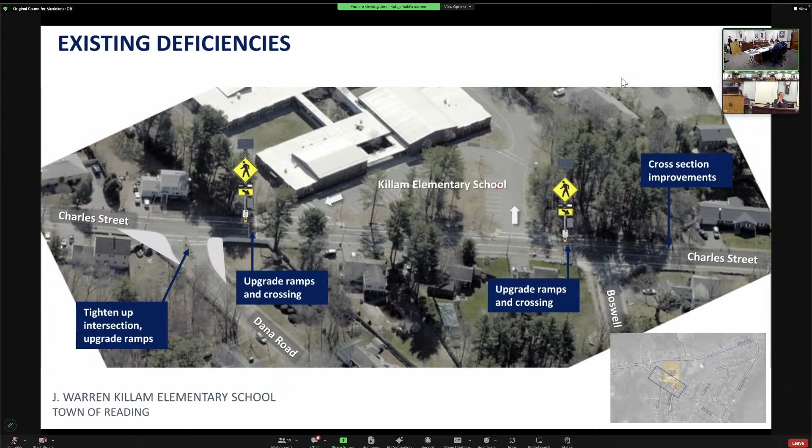I think I froze there. A lot of information. This is recorded, so if people want to look at it, I guess that's good enough. I guess I'm just thinking about getting the word out there, but I think we can link that to the project website. So you got what you presented us now, and then things crystallized and changed.

I believe one of the reasons you guys hired us is because we've worked on tight sites like Swampscott, which every square inch of it is programmed. And it had twice as many kids, and kind of crazier neighborhoods, believe it or not. It's a spaghetti place, because they have a lot of ledge and rock on the ocean. I believe we're gonna use everything we've learned and go over it with you and see if we come up with the best balance.

I'm hoping when you go see Hosmer and Acton Boxborough schools that you'll see traffic flowing well at those. Those are both ones that we worked on, yep. Nicole was responsible for the Acton Boxborough and myself for the Hosmer schools, so hopefully you see things working well there, and that'll give you some more confidence in what we're proposing here.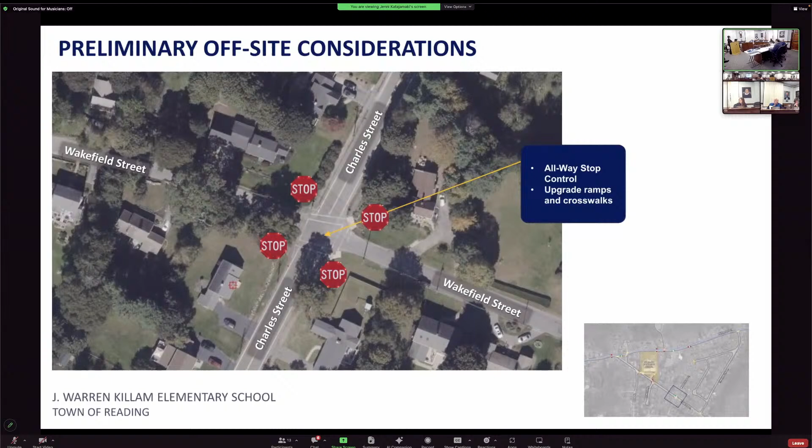It's fantastic, it's so exciting. Thank you, very good visuals. Yeah, thank you, we learned a lot. Thanks for picking, very much. Thank you. Just if I can maybe ask a quick question or comment.

So I think we said tonight that there's a possibility of starting to enact some of these now, potentially some of them later. In the big picture, with the MSBA process payment wise, the site is capped and we're gonna be spending all of the site capped money just within the site proper. So we can always go outside the site and do different items, but it's all gonna be town or district money at that point anyway. So if there's opportunity to do some of it now or do it under separate projects, it's something to consider. I'm not saying you have to do it one way or the other, but there's different things, like Safe Routes to School, where you might be able to get grants specific to the crossing, the flashing crosswalks and redoing crosswalks and stuff like that. So it's something we might want to think about short term, what can we do that will benefit both today and when the new project is complete.